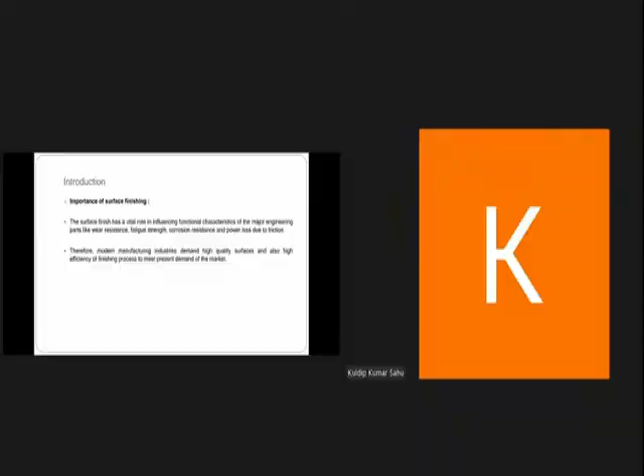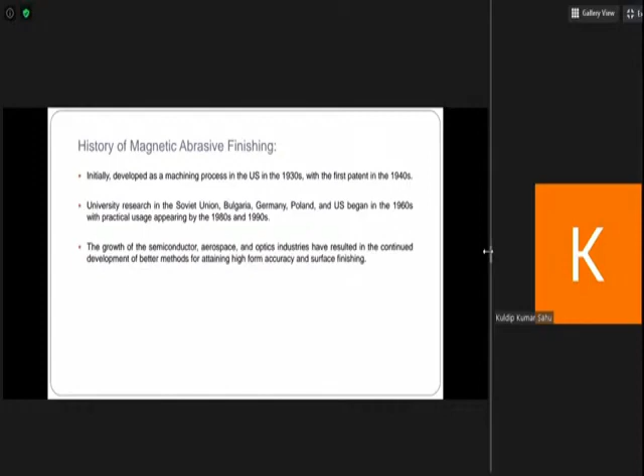So the history of magnetic abrasive finishing: initially this process was developed in the US in the 1930s, and it was patented. This process, magnetic abrasive finishing, was patented in the 1940s. University research in the Soviet Union, Bulgaria, Germany, Poland and the US began in the 1960s, with practical uses appearing within the 1980s and late 20th century.

The growth of the semiconductors, aerospace parts, and optical industries has resulted in continued development of better methods for attaining high form accuracy and surface finishing. So we can see the history of magnetic abrasive finishing as the development in technology, some electronic parts and some aerospace parts. It has been developed.

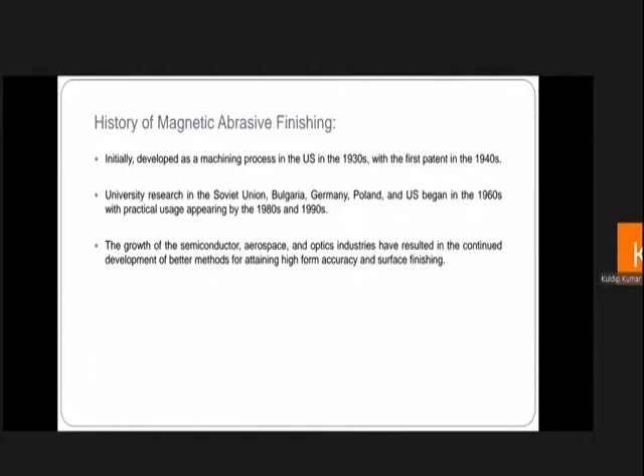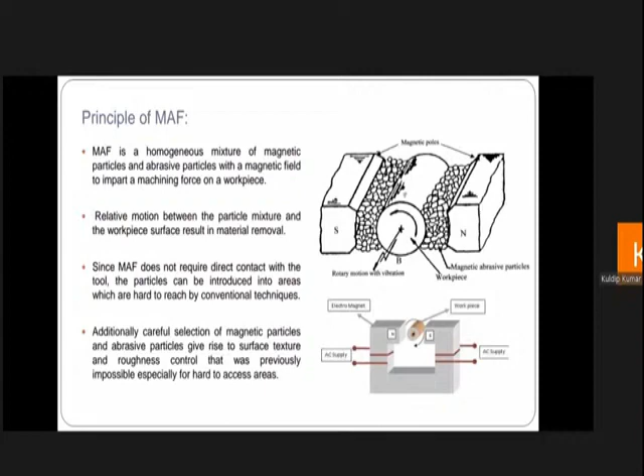So in this era, the requirement of highly surface finished parts has increased, and the researchers need to develop some ultra finishing or super finishing process which can produce parts with highly surface finished surfaces.

So, working principle of magnetic abrasive finishing. Magnetic abrasive finishing uses a homogeneous mixture of magnetic particles and abrasive particles with a magnetic field to impart a machining force on a workpiece.

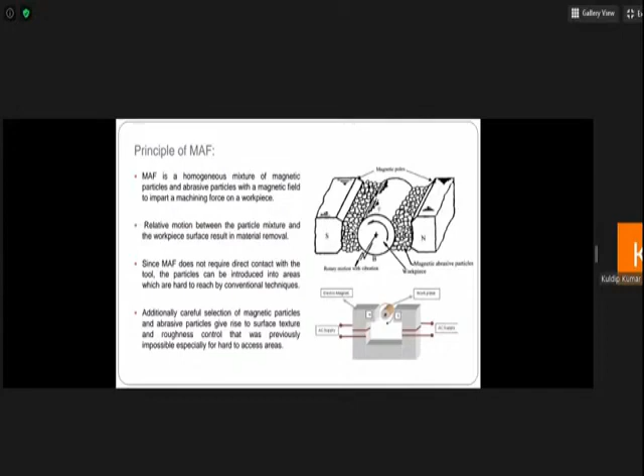So generally we know that the general surface finishing operations are simple grinding operation, polishing operation, honing operation to give better surface finish. And we consider grinding operation as the primary surface finishing operation. But when we need highly surface finished objects or surfaces, then we need to develop some other technique that can develop a very good surface finish.

So in this field, magnetic abrasive finishing plays an important role, and it can develop a highly polished and surface finished object. The relative motion between the particle mixture and the workpiece surface results in material removal. Since magnetic abrasive finishing does not require direct contact with the tool, the particles can be introduced into areas which are hard to reach by conventional techniques.

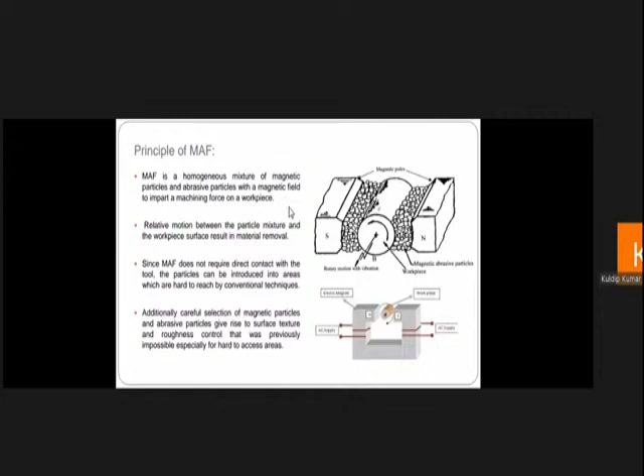So when we see the working of magnetic abrasive finishing, we can see internal parts also can be polished by this process, or any surface which is not exactly round. If we have to finish an oval surface or objects with elliptical cross sections, then magnetic abrasive finishing is the unique and most important process we can choose to provide highly surface finished surfaces.

Since magnetic abrasive finishing does not require direct contact, we can use this process where the parts or surfaces are unable to reach. That means the parts which we have to machine which are not exposed surfaces, internal surfaces also, can be machined by the magnetic abrasive finishing process.